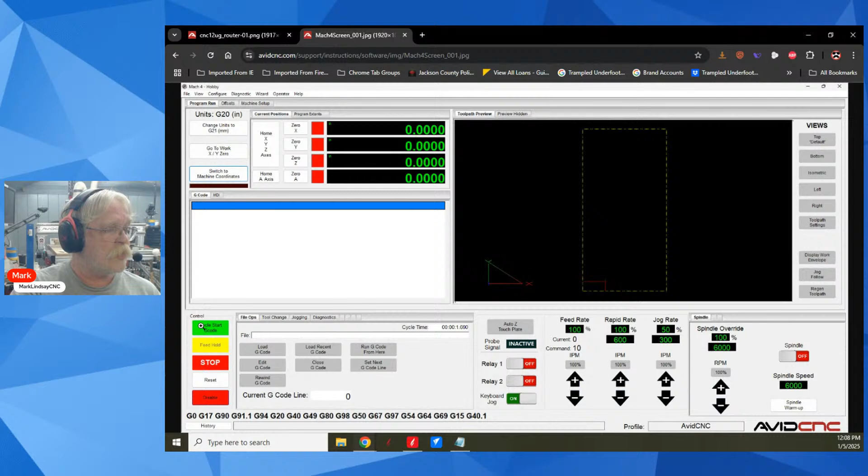The EX control system uses different software. It's called CNC12, and it is a version of the Centroid Acorn controller and control software. It's got a whole new interface that I'm still wrapping my head around. This is the Avid CNC12 profile, and I just need to get used to all of these new controls. Where over here I had my cycle start G code button that was labeled, I now have this button right here that is not labeled.

Took me a little bit of figuring out, going through the manuals and everything to figure out what it is and figure out all of this interface. I think it's a little bit more complex than it needs to be. I think a lot of this could be handled in tabs.

Right off the bat, there is no preview of what the toolpath, where it's going to go, what it's going to look like. I can go down into these menus and find that, but I kind of like having it straight up on the screen when I load G code. So that's taking a little while to get used to. It's just different buttons, different layouts, and a few other operational things.

One of the things I have discovered is on Mach 4, when you have keyboard jogging turned on, you just simply move my Y. If I want to move my Y back, I press cursor up and that moves the Y back. If I want to move it forward, I press cursor down. If I want to move the X to the left, I hit cursor left, cursor right to move it over to the right. If I want to move my Z up or down, I hit page up or page down.

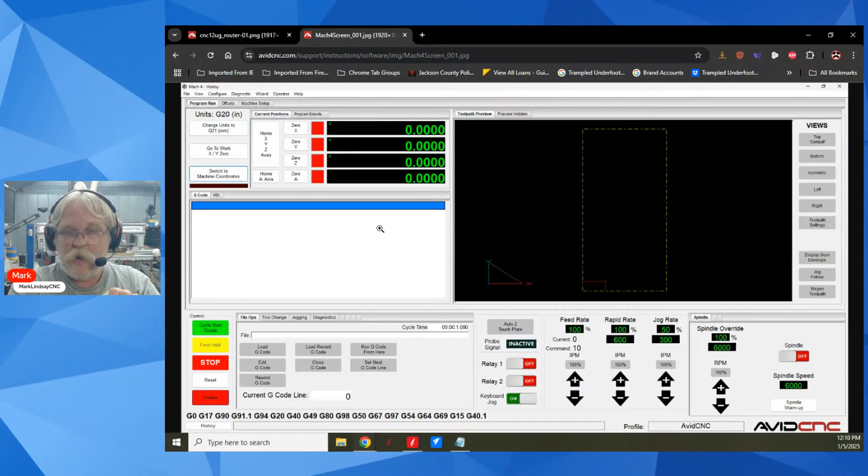Well, it's those same controls in CNC12, but I have to hold down the control key to activate those buttons. Now, that is a good thing, and I can understand why, because it has happened: you drop something and it hits a button, and you could jog an axis that you don't want to jog. That's legit, I understand that.

But so far I haven't found a way to deactivate needing to hold down control and then press the button, because there are times that I do want to do this one-handed. If I'm holding something over here on the table and I need to hit that button, I can't reach those two buttons at the same time. So it's one of those, I wish I could do it, but I can't, you know. So maybe I can figure it out, I just haven't figured it out yet. Like I say, I'm still very new to this software and still very new to the interface.

And I see there's a couple of questions here. Does it have a preview screen for cutting the job as it's being cut, like Mach 3, Mach 4? It does, you have to go into another screen to look at it. I just prefer it being right out here in the open, like I'm used to, so I didn't have to change screens. You can go in once the job is loaded and the machine is homed. A couple of other buttons pop up here that use your F4 and your F8 button.

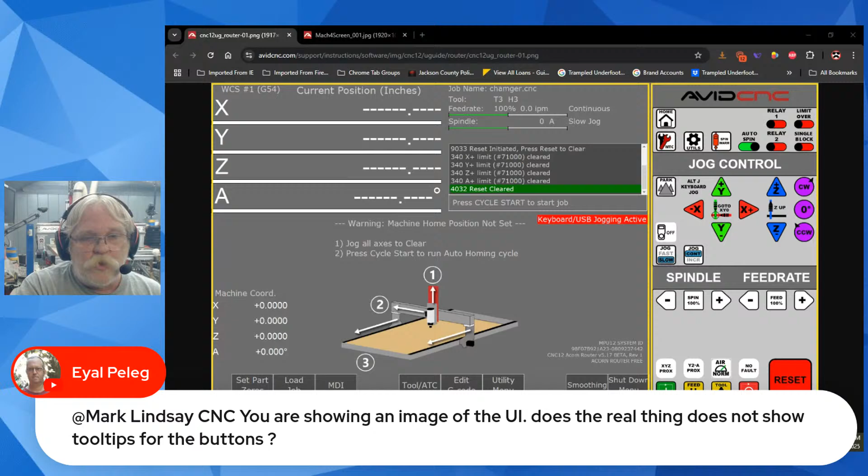So I see a couple other questions here. You're showing an image of the UI. Does the real thing not show tooltips for the buttons? No, it doesn't show tooltips for the buttons.

You can look at this right off the bat and see that this was created with a touchscreen in mind. Everything here is a fairly large button positioned in such a way that it would be very difficult to hit the wrong button.

Your reset and emergency stop is way over here away from cycle start. The reset and emergency stop are both red. You can't really miss them. Everything is more or less separated.

While it's not specifically made for touchscreen, it was designed and made with the touchscreen in mind. And in fact, in the user's guide, there's a lot of documentation on using a touchscreen.

So let me grab something here real quick because I see another question. And the answer is basically yes. Wendell is asking, come on, get it out. Is there a pendant available?

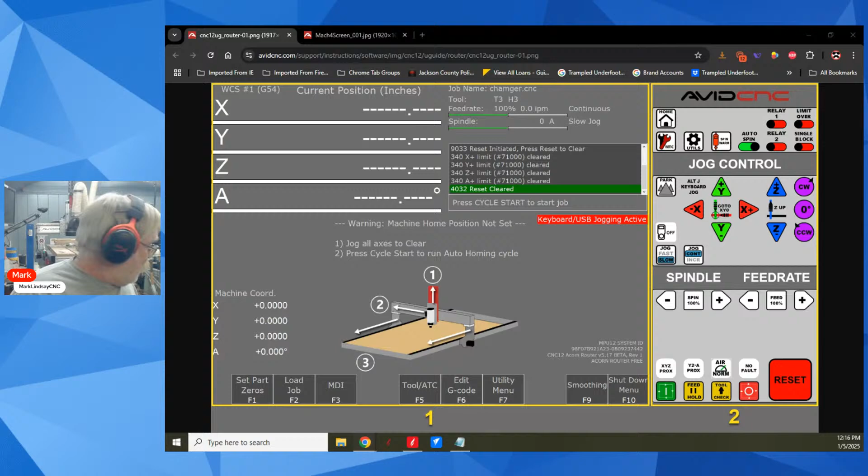A little inside baseball: I was going to do that today, but today's grocery shopping day. So we'll be doing that after I get done with this live stream here. Because while I love my CNC and I love my CNC work, I must be fed.

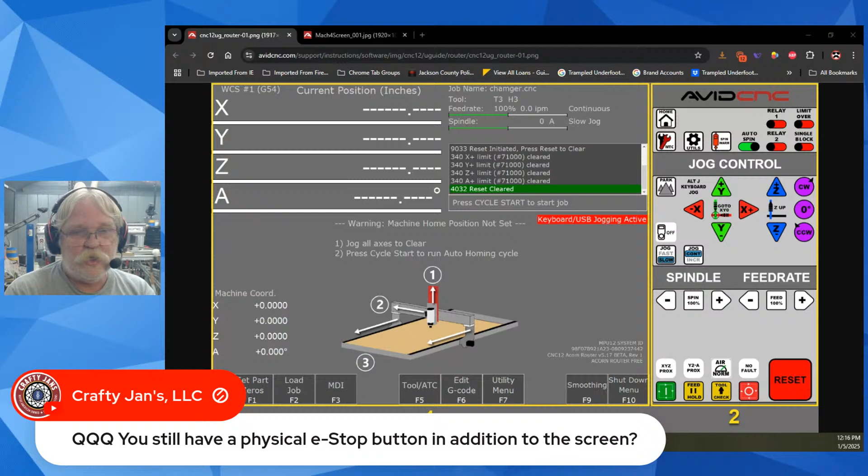Let's see. Kurt over at Crafty Jans says you still have the physical e-stop button in addition to the screen. Yes, I do. It is right above the control box, right there—the red button sticking out of the yellow housing right there. And it's just become second nature to me to click cycle start and then stand next to that button.

Two reasons why it's over there. Number one, I don't accidentally hit it with my hip if it's mounted right there next to my workstation where I stand. And I'm out of range—I'm over there, the whole front end of the machine is clear. So anything that comes flying off from the front, I'm out of the way.

So that's why my e-stop is over there. It's two steps: I click cycle start, I walk over and stand next to that e-stop with my hand on it. Usually I'm over on that e-stop before the bit ever touches the material, because there's a dwell with the spindle to allow it to come up to speed and allow my dust collector to come up to speed.

So that's going to be the next thing—calibration. And then after that, I'll run my first project. My first project is going to be something very simple that I'm probably never going to put up anywhere. And then that's about all I'm going to do, then just pick up from where I left off.

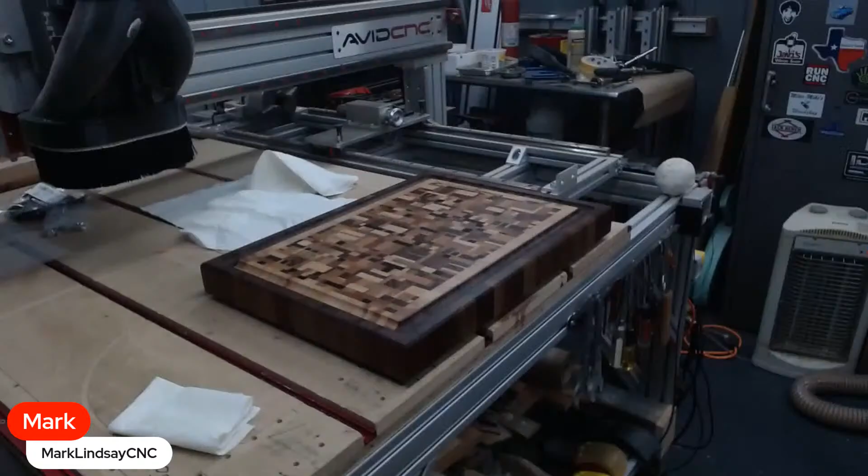And in fact, I'm going to kill two birds with one stone. Kimberly's asking about the cutting board that just got its 4th coat of tung oil. That's it. And while you're taking a look at the cutting board, Kimberly, you can see how easily that camera mount shakes. So any shake you see from the CNC is now due to that. I'll just stomp on the floor.

The cutting board is made up of scrap. I didn't buy a single piece of material for this cutting board. It is 15 by 20, made so I can cut a slice of brisket on it. This is going to be my user. Right now I have 4 coats of tung oil on it. I'm going to do a minimum of 1 more, possibly 2. I don't know yet, we'll see how it goes.

But there's wood from all over the world on this stuff, and some of it I've been carting around for 20 years, some of it longer. So, for instance, there's pieces of white oak in that cutting board that we got when we were stationed over in Germany. We got there in '88. So, there's the cutting board, Kimberly.

So, let's see here. Bob, I got your question earlier. I have it marked, I was going to get to that, but I will answer you right now. And it's going to be kind of another cop out because there's a gentleman here on YouTube and he's very active over on Facebook. His name is Milo Scott.

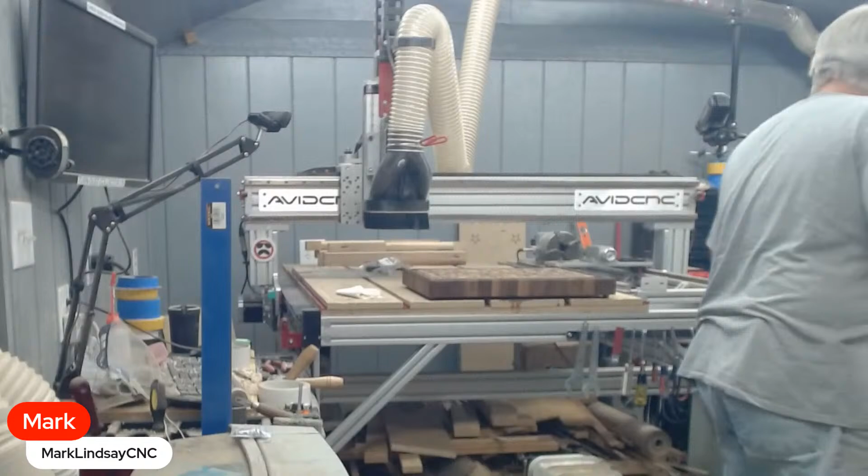My disdain for double-sided tape is well known and public, and I still have a serious disdain for it. However, when you have a bunch of small pieces to surface, it's a lot faster than painter's tape and CA glue. But if it's something that really matters, something I'm carving into, or something I'm cutting out, a profile cut, I use the painter's tape and CA glue. I don't trust double-sided tape. But if I'm just taking 10 or 20 thousandths surfacing off the top, the double-sided tape does work.

Probably toxic to handle it like that, by the way. Oh well, I mean, I figure I'm handling it when I stick it down, I'm handling it when I'm pulling it up. I'm 63 years old, and I'm fine.

Woof, woof. So let's scroll back up here and see what we got.

I'd love a white oak and bog oak end grain board one day. Same here, 8th Center. Bog oak is gorgeous stuff, but oh man, is it expensive.

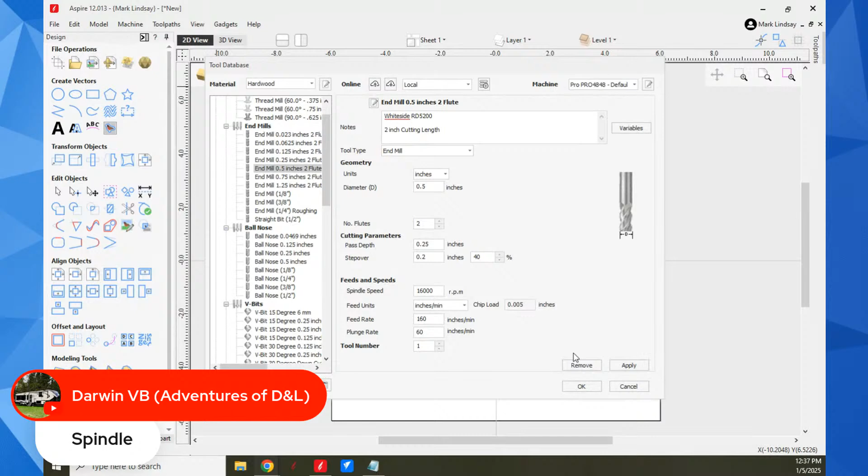So these are always going to be changing. That's why I don't get into the feeds and speeds discussion very much, simply because if I'm cutting hard maple, it's going to be different for walnut, and probably different for oak. If I cut something like purple heart, it's going to be different too. A lot of it depends on your machine, a lot depends on your material. If you have a spindle, that means you should be able to control your RPMs, and you'll find that changes things as well. Generally speaking with this bit, I keep it at 16,000 RPM and adjust my feed rate, plunge rate, and occasionally my pass depth. If it's something like purple heart, I'll bring that pass depth down to 1/8 of an inch rather than 1/4.

The thing is to watch your chips. Some people look at chip load, and that's good, but I also like to look at what I'm getting as it's cutting. I'll adjust the feed rate on the fly because I can. Now that I'm starting this new control software, I don't know that I can do that—I'm going to find out. But experiment. This gets into that test-in-scrap kind of thing, and that still stands. I do that all the time. I constantly test in scrap.

Okay, let's see here. Pete over at Nature's Live Edge says, I'm looking for a good bowl bit. Have you seen an advantage to a down shear geometry, looking at the Bits and Bits 540-BT750?

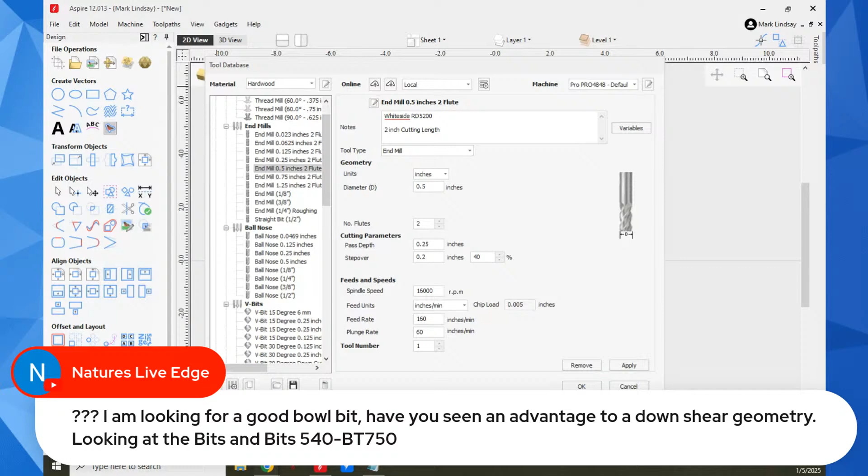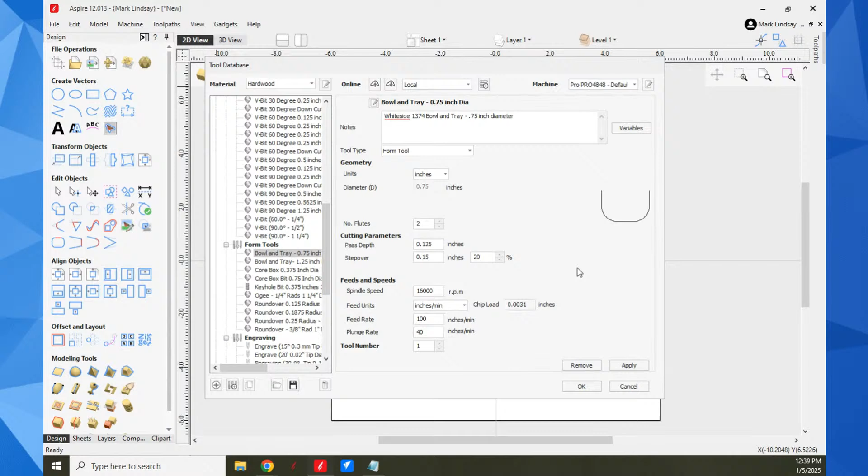I really can't compare, because the bowl bits I have—I've got two of them, one's 1.25 inch diameter and one is 3/4 inch diameter—are the Whiteside bowl and tray bits, and they're just the straight, flat brazed cutter type bits. Let me find one of them. Okay, there's the 1.25 inch diameter. Bring it over so you can see. Come on, get the envelope open, dummy. All right.

They are the straight brazed type of cutter. Generally speaking, when I use this bit, I've also already run a clearance pass. I've hogged out what I need to hog out.

So when it comes time for this to actually get in and do the work, let me change my camera here. Kaboom, back over to the cutting board.

This juice groove was cut with the 3/4 inch bowl and tray bit, and I used my 1/2 inch end mill to hog out most of it. I've got a gorgeous finish down here in this juice groove. Of course, I need to turn it on angle so you can see it. It's a nice finish down in here. I've got no complaints.

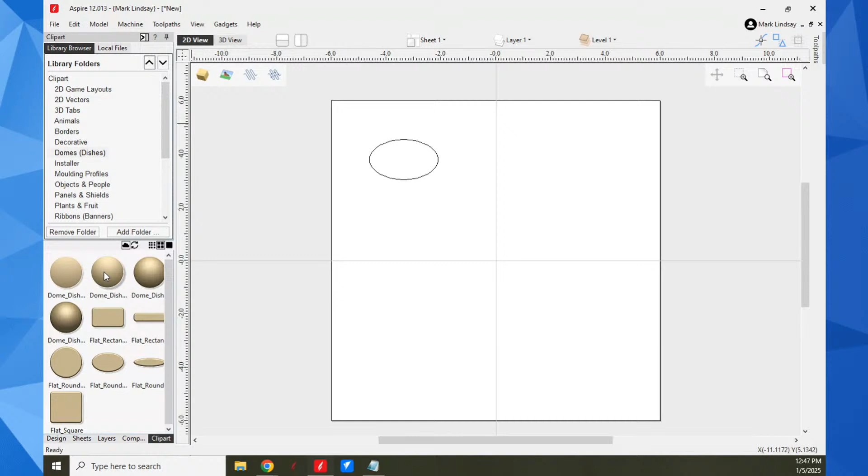Now in VCarve Pro, we'll come down to the clip art. Go into clip art, and I'm going to go to domes and dishes, and choose a 45-degree dome. Okay, and go back over to my design tab.

Now, immediately what I want to do—I shouldn't have gone to my design tab. I need to go into my component tab, because what I need to do is right click on that dome dish and change my combine mode to subtract. That makes it a dish rather than a dome.

Now, I want to come to the design tab and resize it. I want to turn off link XY because I want a custom size, and turn off auto scale Z because I want to adjust my Z height manually. I want to make my width 2.5 inches, and the height 1.5 inches. And I'll click apply.

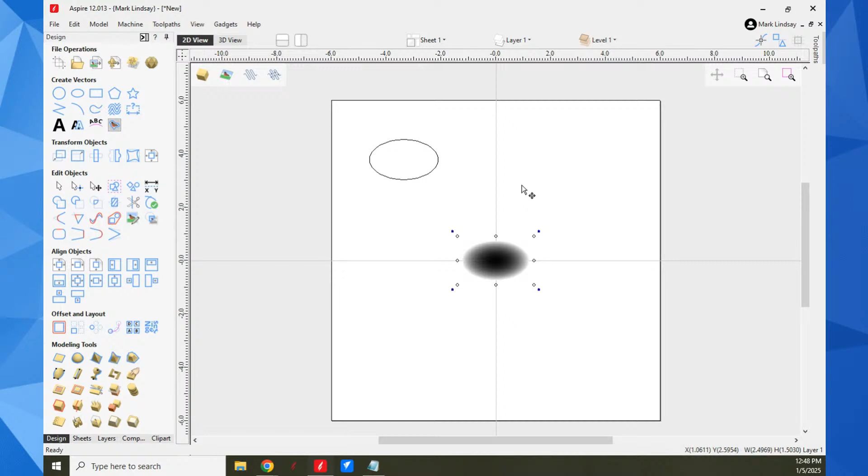And I now have my model, my shape. Now I'm going to select the model, hold down shift, and select the vector. I want to do them in that order—hold down, select the thing I want to align, then select the thing I want to align it to.

Go into alignment, and right here, I want to align the selected object to the last item selected. And I want to center it. I'll click that, and it puts that model right inside that vector.

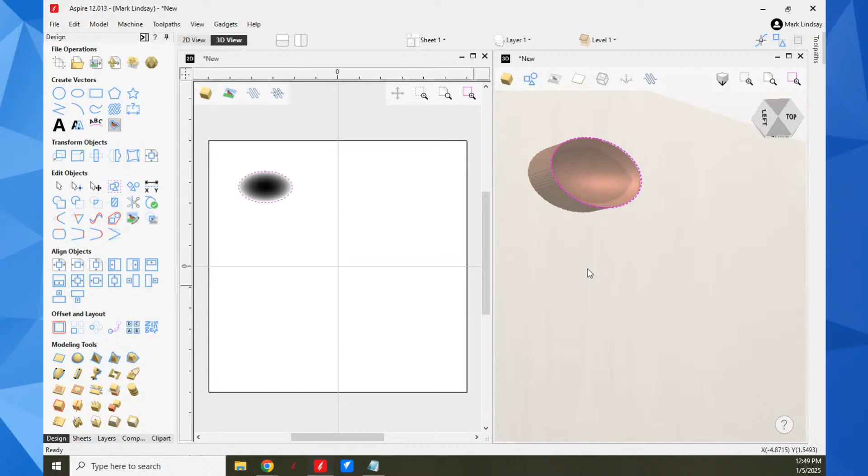Close. Now I'm going to split my 3D view this way, and there is my cup. But now I need to adjust the Z height, simply because this could be 2 inches deep, and I don't want that. I want it, let's say, a half inch deep.

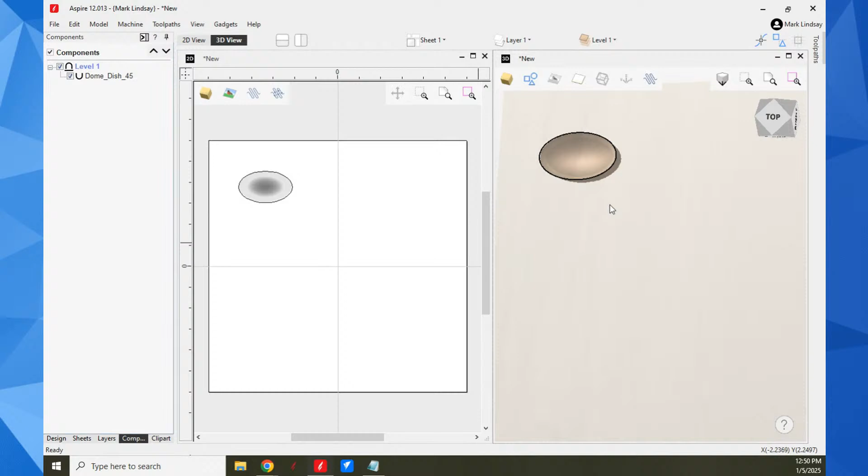I'll go into components, select the dish, right click, go to properties, and yeah, it's a little more than—it's a little way too thick. I want it to be 0.5 deep. Let that catch up, close, and there we go. There's the indent. Now, yes, I did do this in Aspire, but it's identical in VCarve Pro.

Now, if let's say I want 6 of these, I'll select both of those, the model and the vector, and I'm going to do a linear array.

I want 1 row in Y, and I want 6 in X. And I think I can get away with a gap of a half inch. Let's find out.

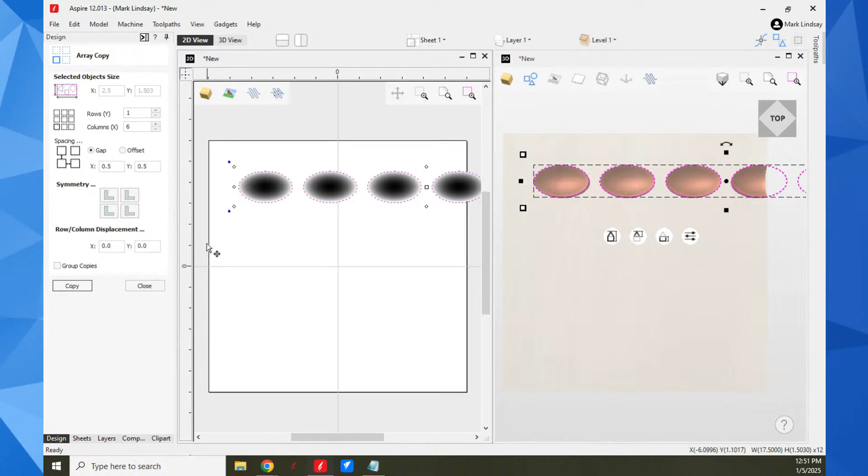And now I'll copy them. Why didn't we copy? There it is. Oops, I went back, I went the wrong way—I went with 6 in X. Uh-oh, Control Z. We're going to go 6 and 1, I went the wrong way. Oopsie. Now let's try it. Copy. It'll take a minute because it's creating 6 models, and I went backwards. That's all right.

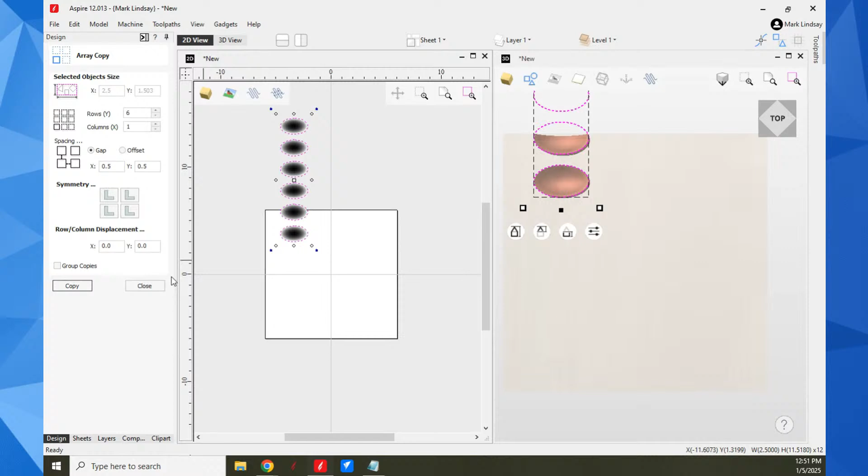Close. Drag them down. And it turns out I can just barely get 6 here on that sheet.

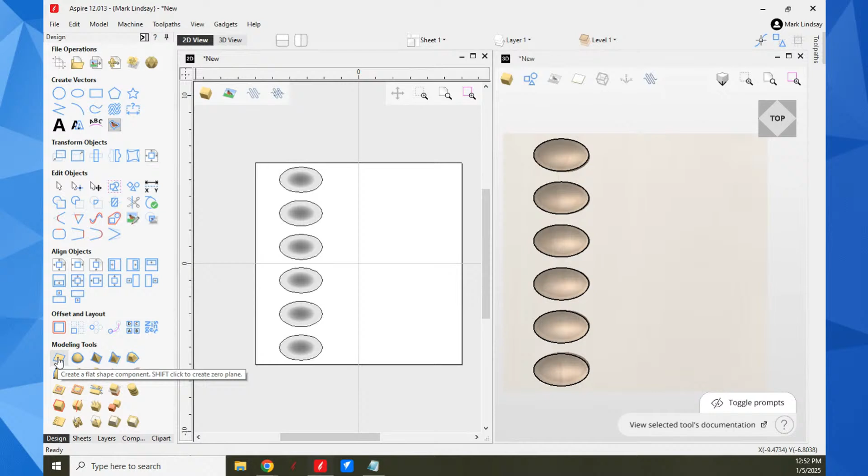Now, as Kimberly alluded, after I got all of them placed where I want to place them, I'll create a 0 plane. Now, in VCarve, you only have to click this icon; in Aspire, I have to shift click it. Otherwise, it's going to create a shape, and I don't want to do that. The reason for that 0 plane is it will get in here and fill in any gaps where the model ends and the surface of the material starts.

So now there are the indents for the pipes or the deviled eggs or whatever you want to make. But they're all in the correct location. They're all the correct depth. They're all identical, they're all lined up.

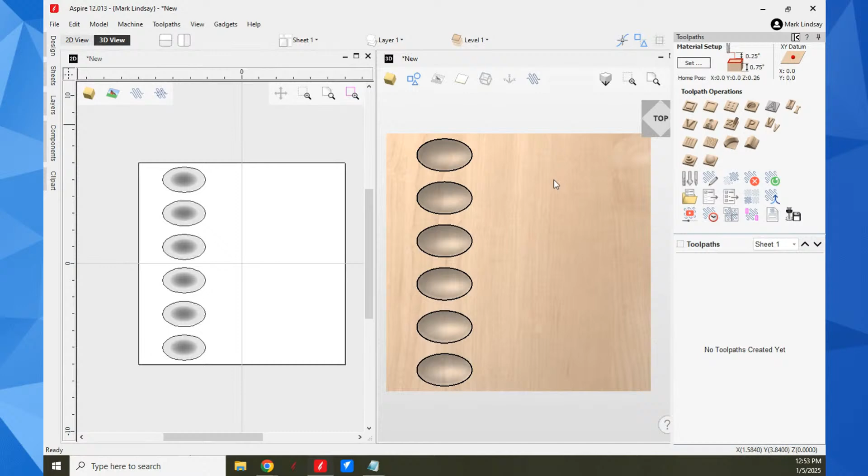Now, the last thing, and this is one of the most overlooked things I think most people run into, is in material setup. Because you have your model created, you have it placed in X and Y. Now you have to place it within your material. Are we starting at the surface, or are we starting from—oops, wrong button—the bottom of the material?

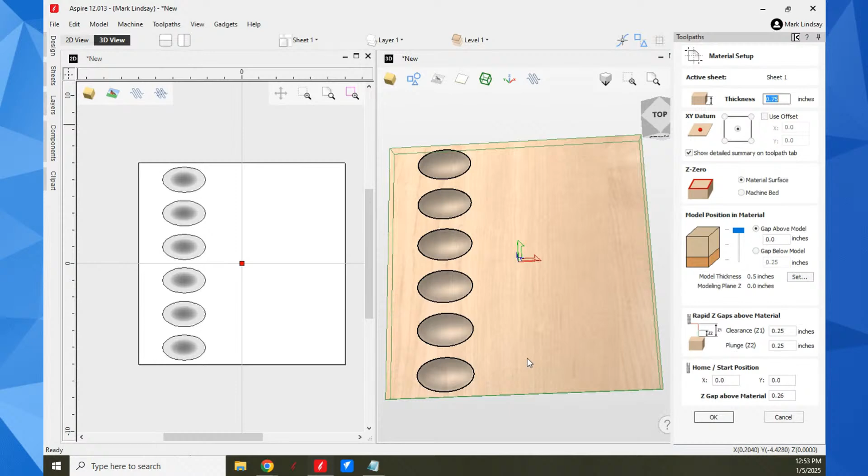So we'll go into material setup, and we see right now, here's the position of the model. There's no gap above the model. The model thickness is this light color. This dark color down here is any material below the model. So we see right here, the gap beneath the model is a quarter of an inch, and that's fine, meaning there's a quarter inch of material right here that is not illustrated because it's not a part of the model.

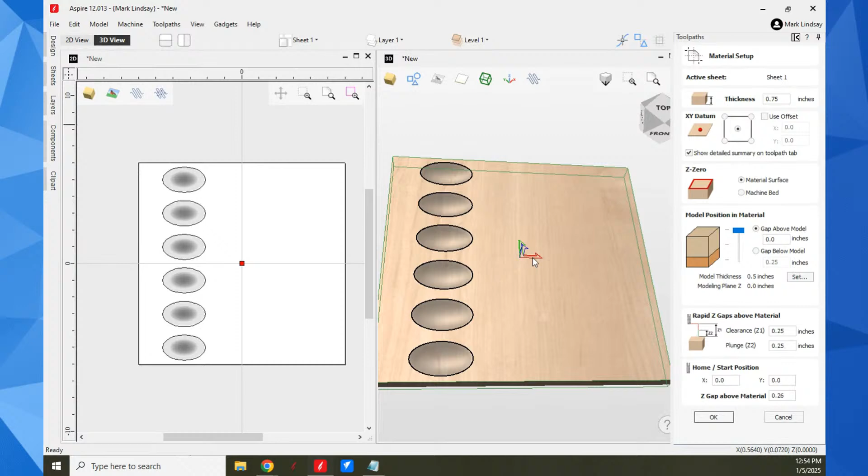That's another point to be made. Once you add a zero plane, it becomes part of the model, so now the entire surface is part of it—these aren't the only pieces of the model anymore. I didn't need to make any modifications. When I go to do my finishing toolpath, or even my roughing toolpath, and select my machining limit boundary, if I select model boundary, the entire surface of my piece of material is that model. So if I select model boundary, it's going to calculate this flat area out here and try to carve it.

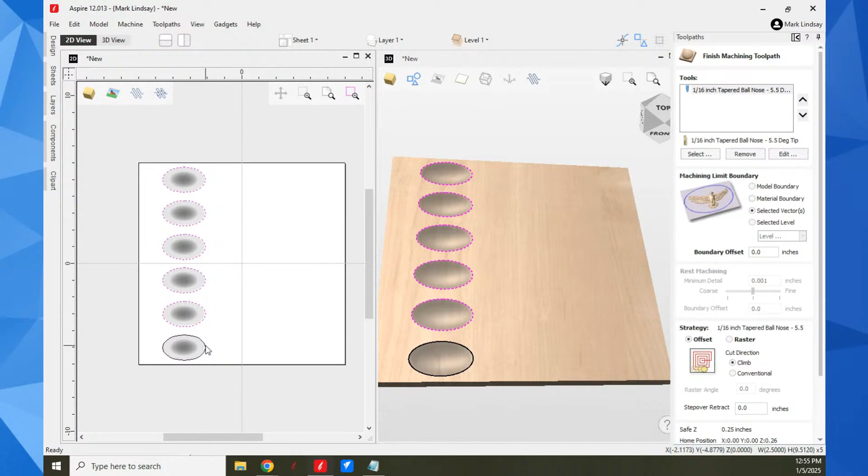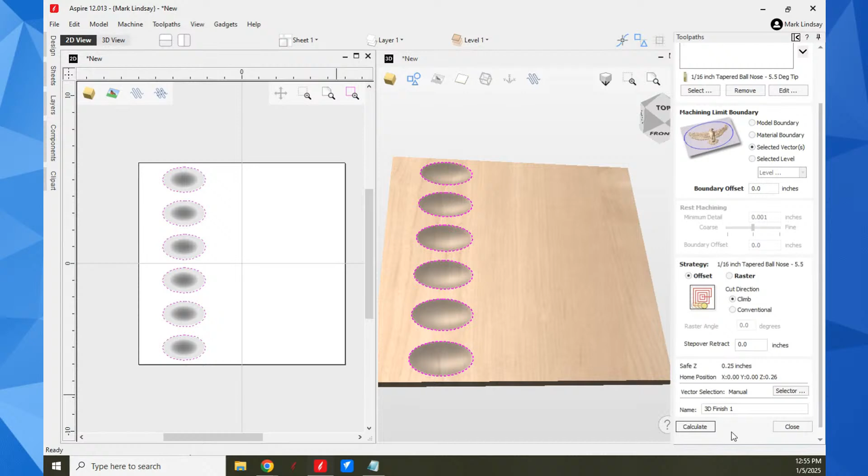You may not want that. So what you would do, to me personally, is go with selected vectors. Then all I need to do is select each of these vectors out here, meaning it will only machine these areas—it won't machine anything out here, even though that's part of the model. Or, because I know this is on layer 1, I could come down and use my vector selector and associate layer 1 with this toolpath. I'm not going to do that now because this is the easiest way—just select the vectors, calculate the toolpath, and that's all it's going to cut.

So, the long answer to the short question—that's how you do that.

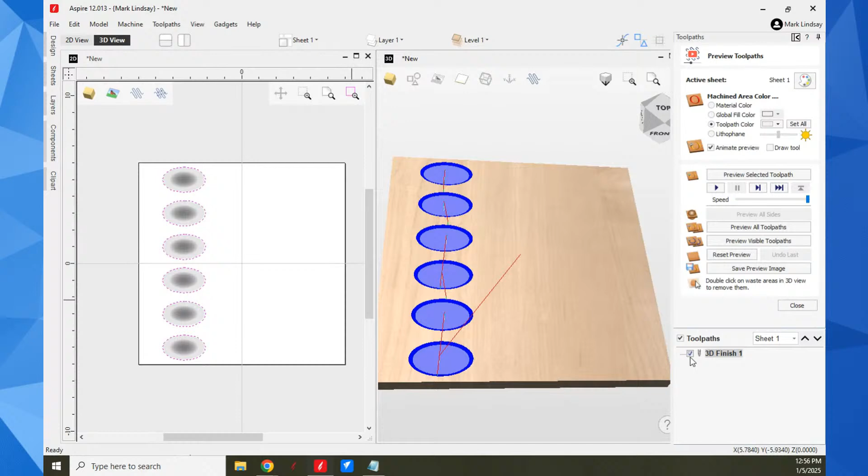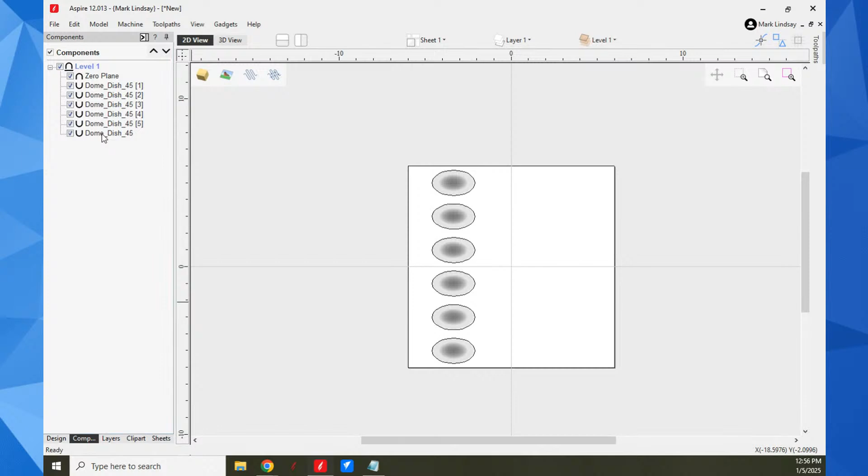Would you want to tilt or fade the dishes to have the pipes lean back? You could—that's entirely up to you, but that's getting into a bit more than we want to get into right here. You can tilt or fade these dishes. Let's close that, slide over here, and go back to a full-size 2D view. But that would probably be better served being done before you add the zero plane and before you do the linear array. Just know that in your component tab, there would only be one—there could only be one. Go into properties, and there is your tilt and fade. You can do that; I would do it before the linear array so they're all the same.

But the clip art here is a great resource for VCarve Pro users, because you can't create your own 3D model, but you can resize and reshape some of these 3D models. You have your domes and dishes, and you also have 3D tabs, which can be used for various components—turned into handles, dowels, whatever. There are various shapes: round, pyramid shapes, rectangular, truncated pyramids—all kinds of different shapes you can play with. These can be resized, although they can't really be edited, but I use the domes and dishes a lot, really a lot.

8 Center says you can still make your own STL files and import them, which is quite easy with certain shapes more than others. Yes, if you have another 3D modeling program, you certainly can make an STL file and import it into VCarve. So yes, very much so—but the point is that you cannot make your own 3D model in VCarve.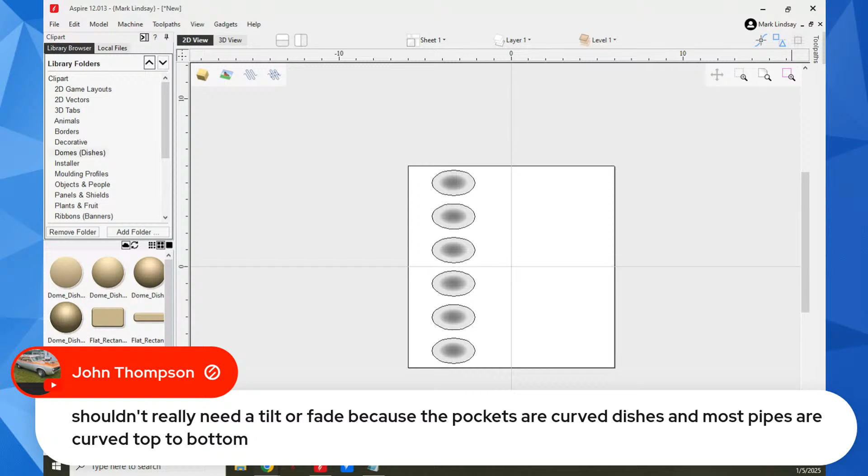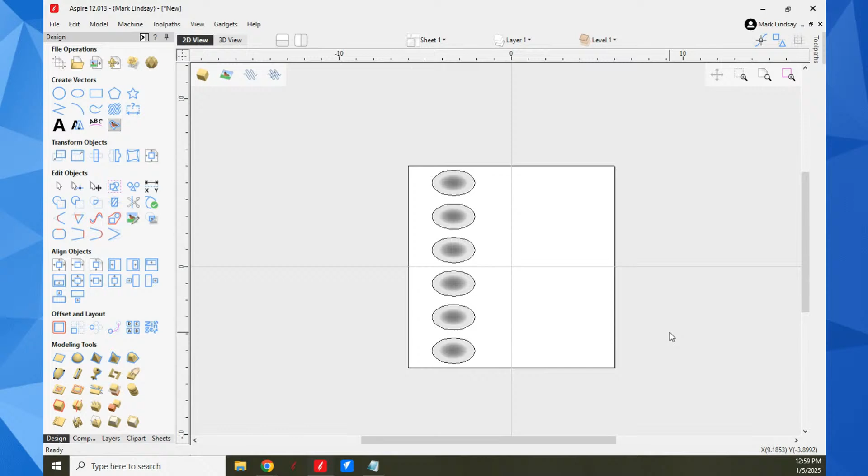John says you shouldn't really need a tilt or fade because the pockets are curved dishes and most pipes are curved top to bottom. That is true, unless you're talking about something like a corn cob where it's pretty straight sides. But yes, I think leaving it be would actually be the way to go—that way it doesn't matter what the shape of the actual pipe is. You could just drop them in. I think the hard part would be sizing more than anything else. But that's just me—I could be wrong and probably am. I'm not a pipe smoker, so I don't know what's the norm and what isn't.

So what's the difference between tilt and fade? Let me go back over here, and we're going to go up to Help, then Help Contents—and of course it opens up a browser page. We're going to search for tilt... editing in the 3D view... tilt and fade.

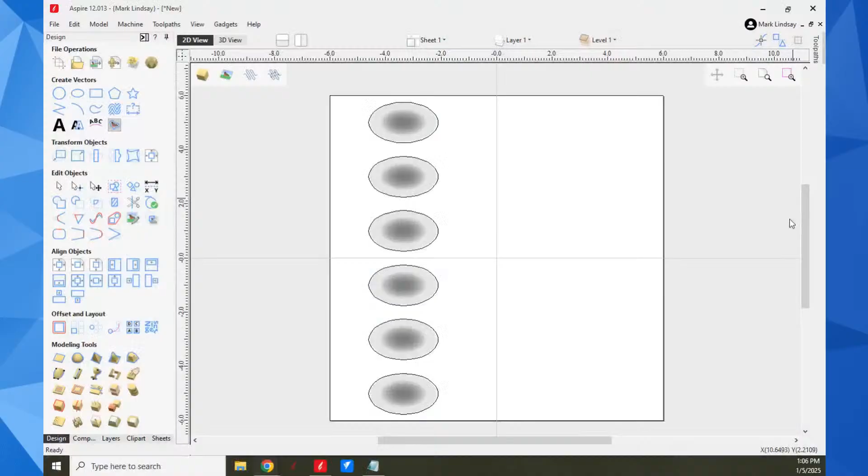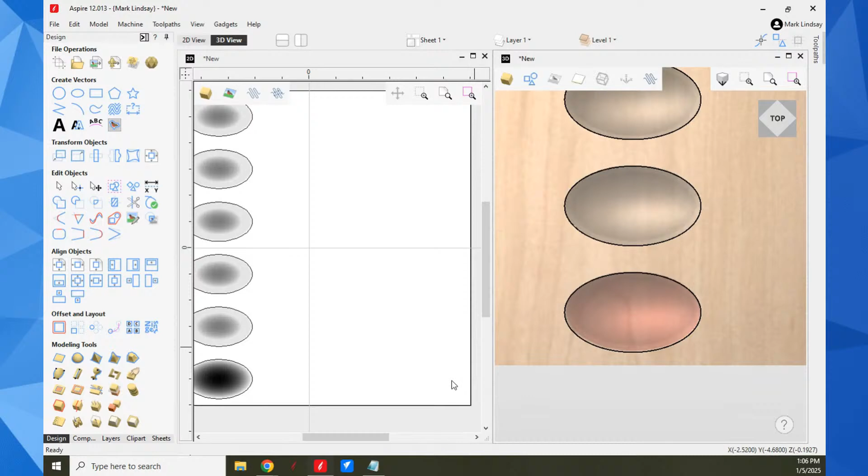I'll bring it back up here. For instance, let's go into 3D. I'll split my 2D and 3D view. I'm going to use tilt and fade on this one because it's on the bottom, easy to zoom into and easy to spot. I've got it selected. I'll go into my component tree and close - that's the right one. I'll right click that one and go into properties.

Now I'm going to fade, which is moving down. As Brooks Martin said a minute ago, fading is done in percentages while tilting is done in degrees. So I've checked fade, now I'll click set, and I'll come out to my 3D view - you see how my cursor changed to an anchor with the number 1. The anchor is going to be the anchor point.

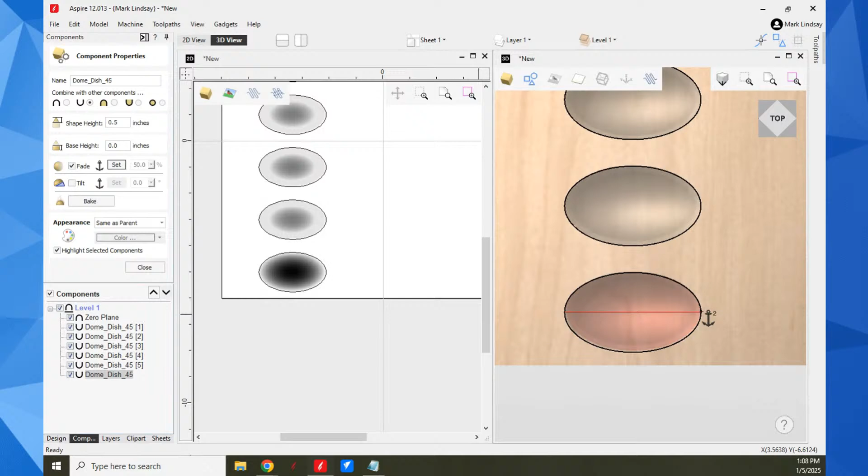I'm going to put that little plus sign right over the center edge of that egg cup, and click it. Then I'll come over to the other end, and you'll see my cursor has that red line attached to it, with the number 2. I'll go to my second point, and I want to tilt it this way, or fade it this way. I'll click, and now my fade is set at 50%. I want to click and watch my 3D view. If I bring it way up, let's say to 100%, and let it go.

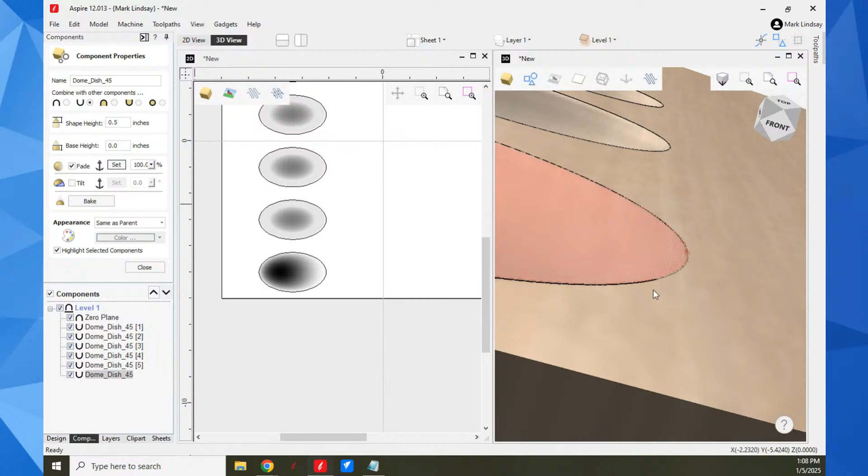If I look, you can just barely see this tip is kind of above the model. Let me go back up to the top.

If I maximize the 3D view and bring my cursor over here, looking at my readouts down here in this corner, if I go right here, I'm at not even half a thou deep. And if I come out here to the center, I'm 0.2496 deep. It's slowly sloping down, and if I move back this way, it's slowly sloping up.

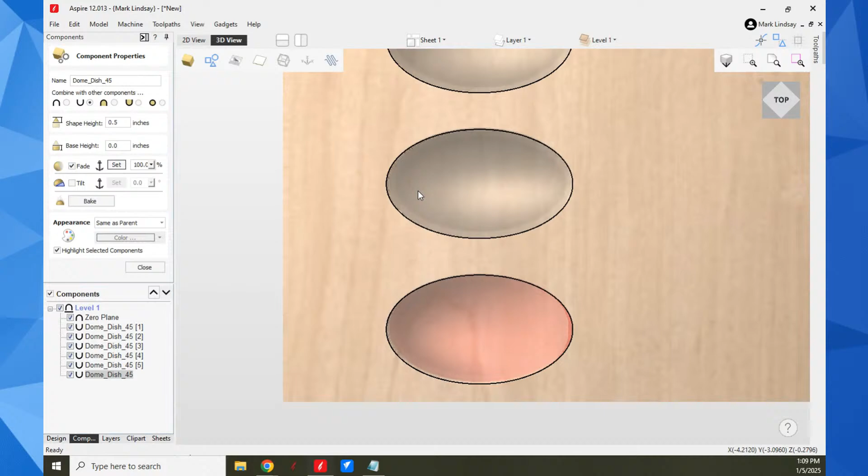Now, if I compare that to this model, down here I'm almost a half inch deep, where down here I'm about a quarter inch deep. And it's an even balance. Here, I've taken that entire dish shape and I've done that with it.

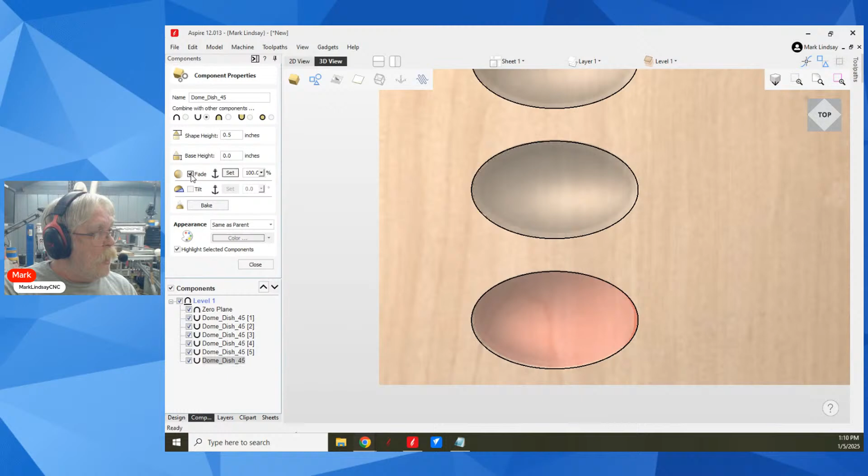So I got it backwards — fade is lifting up. Now if I look at my 2D view, you can see what it's done to the model here. This is now the deepest point, and we gradually work our way shallower.

Maurice, pretty cool swimming pool slant. Yeah, pretty much so.

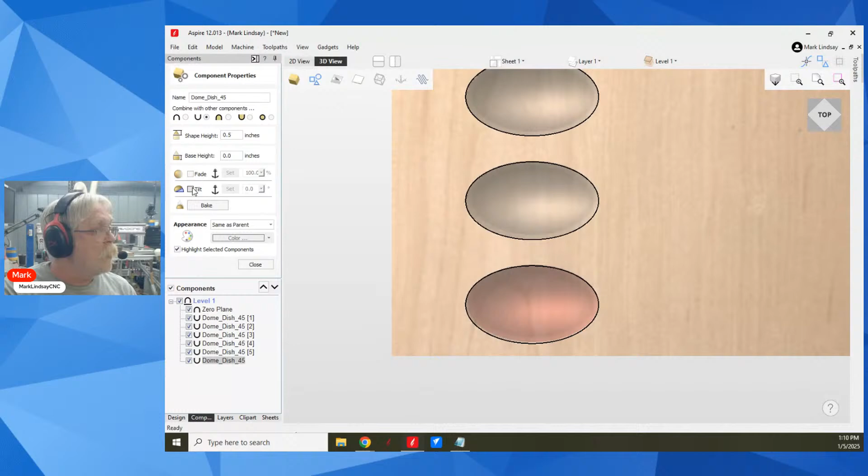So we'll go back into the 3D view. I've unchecked that and got rid of that fade. Now let's tilt it — bring it in here so it's closer to the center again. We'll click tilt, then I'm going to click set. And again I've got the anchor, so it needs to know the end I'm going to tilt from. And I'll click this edge of the model.

Now someone asks, does holding down shift keep the line parallel? Let's find out. Hold down shift — no, it does not. I can go anywhere. I'll just go to the center of this edge over here, click, and now it's applied that tilt.

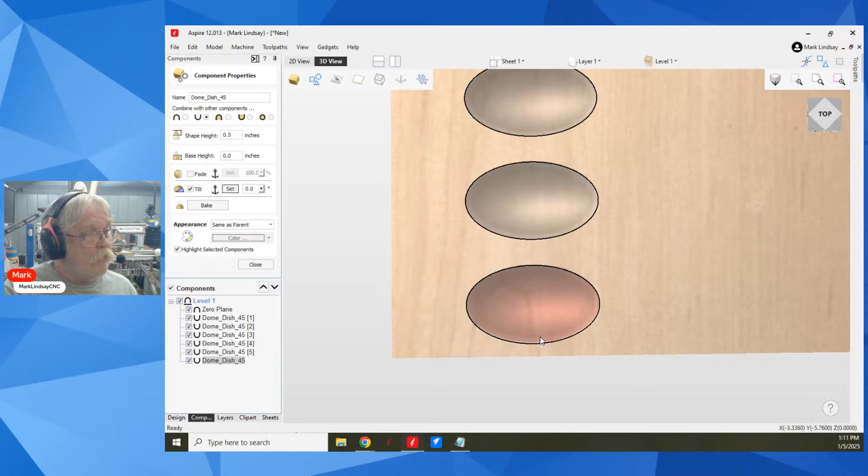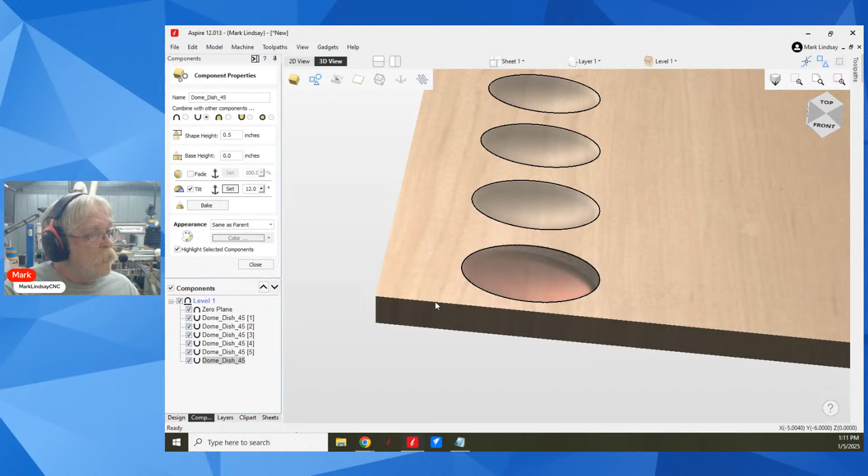But I've got it set to 0 degrees, so there is no tilt. Let's click it and go halfway — see what it's doing? Tilting, it's tilting it down. This end is anchored. Oops, there we go, I'm only at 7.8 degrees. If I go to 12 degrees, I have tilted this edge down.

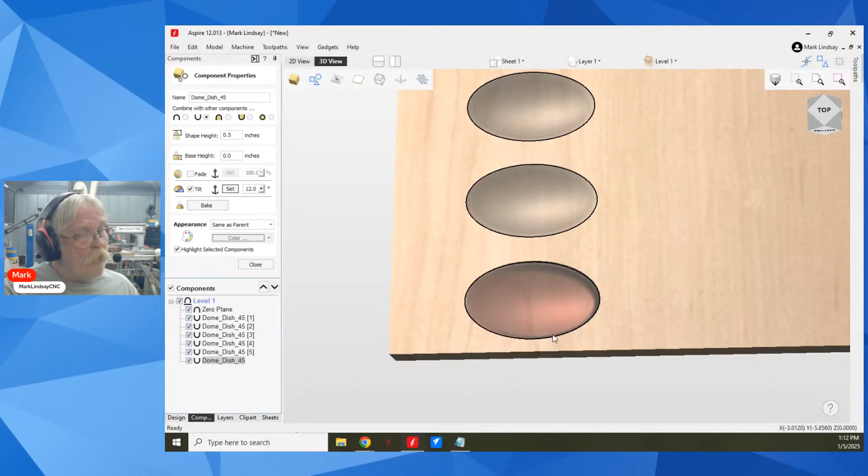So we can see what we've got here. I start out at 0.0494 and I go way down. My center is closer to 0.67. And now I'm coming back up — 676, 672, coming back up. So you can really see on this edge view here, it really dropped it down. See how that goes? This is still up here close to the top, and this is way down. So that's what tilt and fade do.

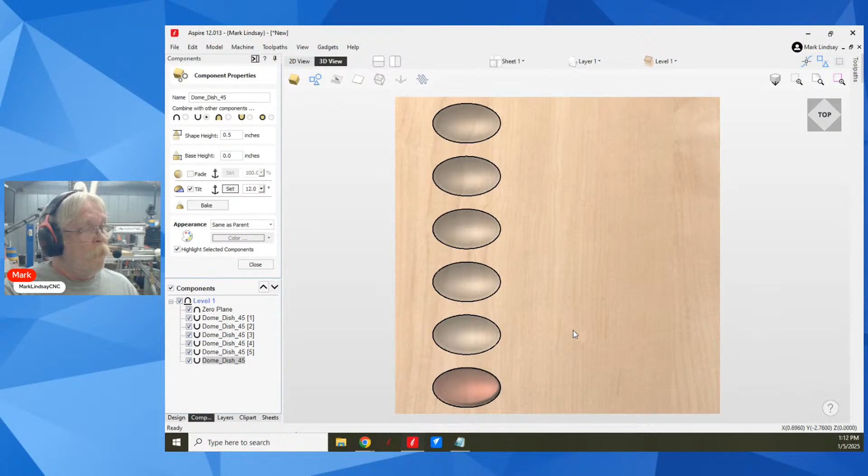Now, if you wanted to do something like this on a pipe rack, I would suggest experimenting. This was not meant to be a tutorial on how to use tilt and fade. It was more or less just to show the difference between the two. So I got it backwards — tilt pushes down from the anchor point, fade lifts up from the anchor point. Tilt uses degrees, fade uses percentage.

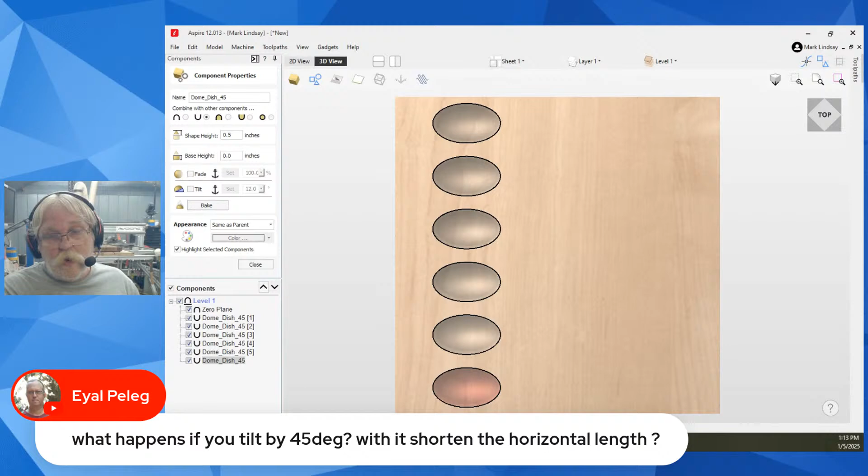What happens if you tilt by 45 degrees with it shortened in the horizontal length? I don't know — get in and experiment with it. Can you add an additional vertical tilt? I don't know — get in and experiment with it. I mean, this was never meant to be a tutorial on how to use tilt and fade.

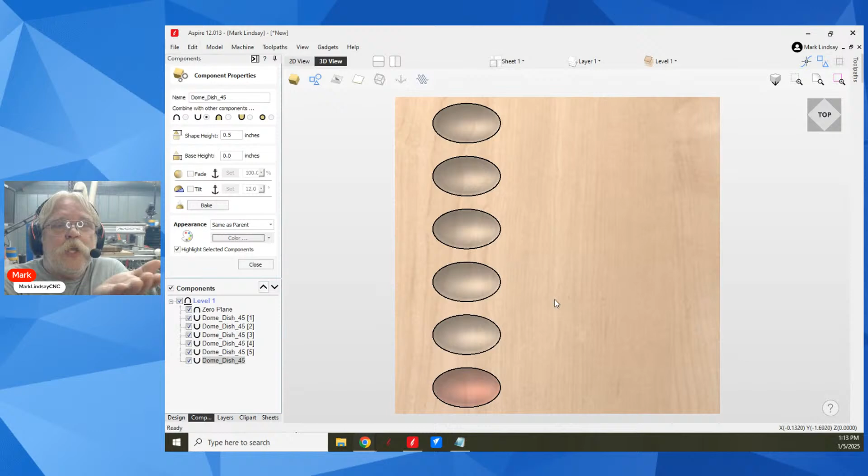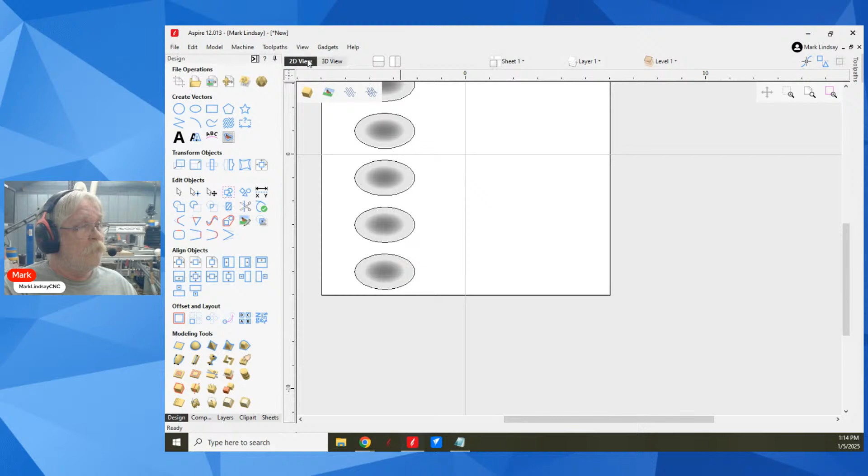Basically, if you're thinking you can flip it and model from the edge, I don't know that that's true, I don't know that you could actually do that. Again, this is not parametric modeling, and it's not NURBS-based modeling or triangle mesh-based modeling. This is bitmap-based modeling, so it will not create an undercut, if that's what you're wondering. And dealing with vertical surfaces, it will do it, but it's difficult.

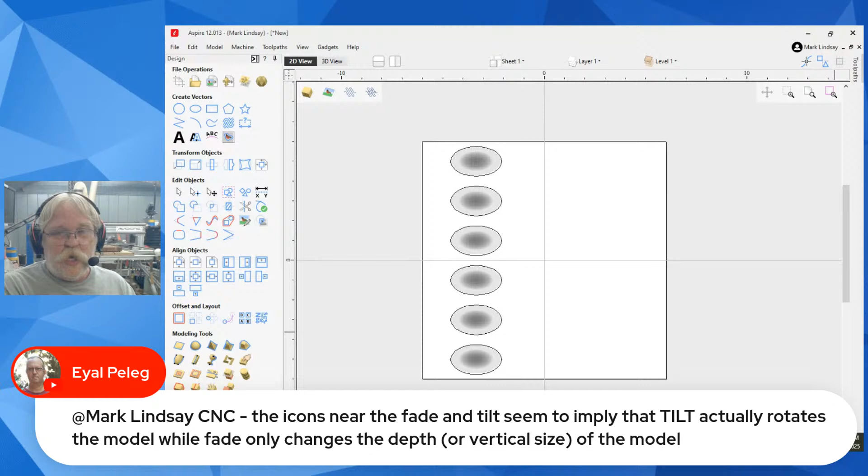The icons near fade and tilt seem to imply that tilt actually rotates the model, while fade only changes the depth or vertical size of the model. Yeah, there is some truth to that.

All right, let's see. I think that was it. Don't worry about it. Ellen made me do it. Yeah, right, she held the thing to your head and forced you. Now don't worry about it.

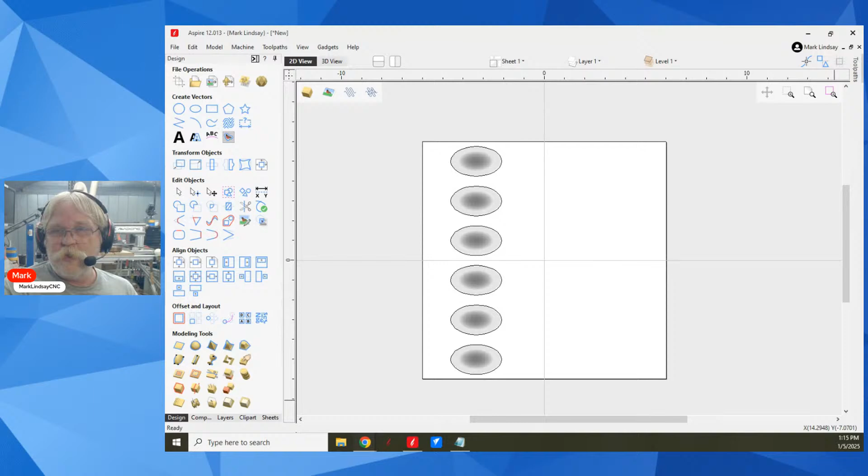Rabbit holes are how I figure out ideas and find out what you guys want to see, because this has never been about me, it's always been about you, so it's what you want to see. What I need to do, and it's on the list, is a video on the difference between tilt and fade, all encompassing. The thing about it is the documentation only goes so far, and the tutorials only go so far.

Even the people that work at Vectric will tell you they are forever, perpetually surprised at what people come up with. Channel member and friend Mike Bernasconi, when he went to the Vectric user group meeting down in Austin, had some pictures to show the folks at Vectric. Edward, who I believe is the CEO, looked at it and said, you didn't do that on our software. He said, oh yes I did, and here's how, and showed him. They are perpetually surprised at what people have figured out that software can do. Nobody knows everything, not even the people that make the software, because unless you've tried to do it, how do you know? So push the envelope, get into it.